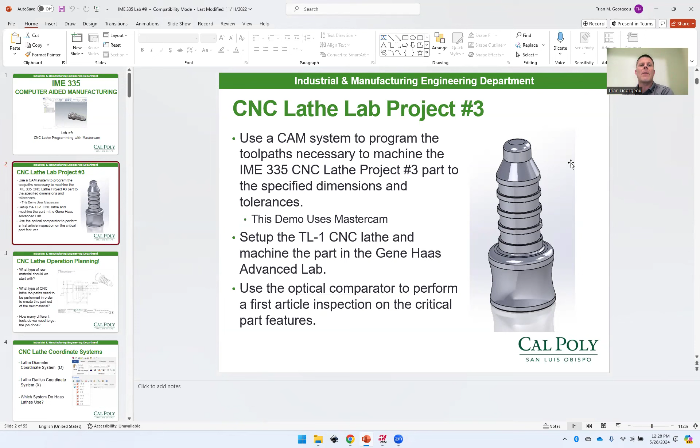We're ready to roll. So what we're going to do is we're going to program our CNC project number 3. I believe a lot of you turned in the drawing right before class, so you have the model. And what we're going to do is we're going to plan together. Sound good? So you modeled it.

What size stock would you machine this thing with? Leslie says 1.5 diameter. Yeah. Oh, it does say it on the drawing. So we're going to use 1.5 inch diameter, right? And if you remember last week, we have our stock in there. What's holding onto the stock? You say the chuck. So that orange is a chuck.

So we need to come up with a stick out length where you're not cringing when the part off tool is this far off the chuck. Sound good? Because I don't want that to happen. Now, if we look, this thing is 3.75. The part off tool is 1/8 of an inch thick. So right now, no matter what, the part off tool has to come to 3.875 back. I say we at least give it 1/4 of an inch plus that extra 1/8 that we have. So let's pull it out to 4 1/4. Does that sound good, everybody?

So when we set up on the lathe, we're going to pull it out to 4 1/4 every time and touch all of our tools off on a 4 1/4 stick out. Cool? So we know that right here to right here is 4.25. Fair enough? Now, then our diameter, 1.5.

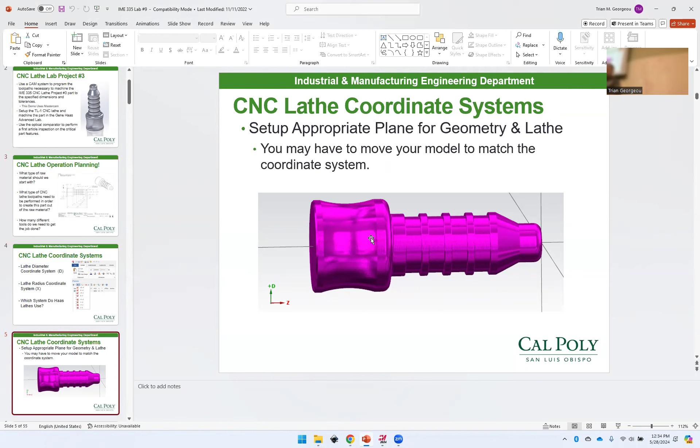And we're going to end up making sure that that gives us a Z and a D. Does that make sense? Z is along the length of the part. D is the diameters of the part. We doing good? It's really easy. This is 2-axis. And because it's 2-axis, we're going to go through the lathe post processor there. I could really program the whole part off that.

It's a half of a profile where the Z values are really what they are, and the X values are the diameters. We're going to talk about how that works. Sound good? So we're going to work on making that profile out of Mastercam. And then after that, we will go through, add stock, and then create the tool paths. I'm not going to come back to the PowerPoint. I would probably watch the video over looking at PowerPoint slides.

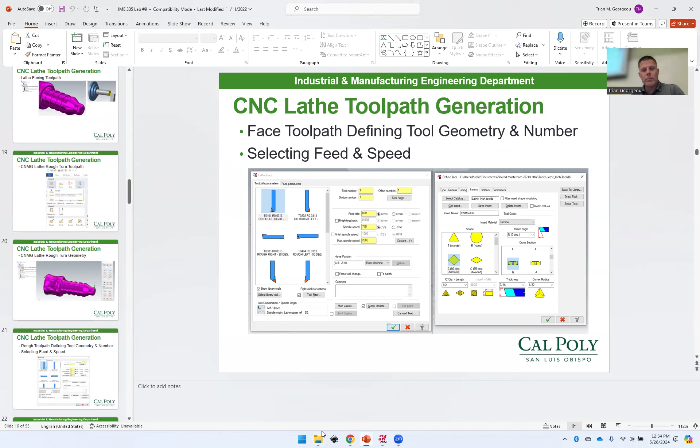Cool. So when I come into Mastercam, are there any questions so far? And if you get lost, ask a question. Don't have me redo it for you. Sound good? Go ahead. Yeah, you should. You use the part to make that profile. You can do it either way. You could draw line by line, or you could import the part and have it make it. Your call. So there's always a hard way of doing something, right? You can do it that way.

So check this out. We're going to go File, Open. And I'm going to go hit my computer, browse. I got to go find where I put it. So it's going to be in Spring 24. That's definite. It's going to be in 335. That's an even better guess. And I'm going to go find SolidWorks. I'm going to guess it's Lathe Project 3. And I'm going to press Open. Cool. I'm going to make mine shiny. Ooh. Okay. You didn't have to do that, but it looks better, doesn't it?

You know what? 3 out of the 4 teams were using Fusion. 1 team was using Mastercam. Thought that was interesting. You can bring its tools. You can bring whatever you want. Yeah. I'm not allowed to really tell, but Mastercam. But you don't know really who. I'm not allowed to say the name of the winning team because it's debuting on YouTube July 1st or something like that. Huh? Oh yeah, especially with me, I'm all over the place. I don't know if they liked me or just thought I was a weird Californian. We'll see. Probably both.

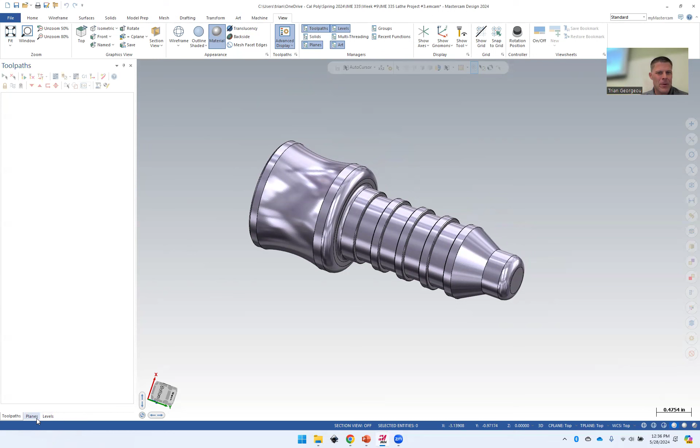So check this out. Is everybody doing good? Where do we set up over here? Yeah, planes. So we're going to go to planes. And when you have your plane here, if you look, we don't have a regular Cartesian coordinate system, right? We have the D positive, Z positive. But don't do this right now. I'm showing you some stuff. I'm going to make your life easier. Trust me. Don't do what I'm doing at this point, though, because there's a better way to do it. I just want to explain how it works.

So when I go to D positive, Z positive, and I go to equals, do you see down here at the bottom, this term changes to a D positive, Z positive. It's a glitch. Sometimes it goes away. Don't freak out if it goes away. So with that, I'm actually lined up pretty well right here. Now, don't do what I'm doing here again. I'm going to show you from scratch how to do this. I'm just trying to show you how this works.

If I went to model prep, wireframe, and called turn profile, what do you think I'm going to select? The part. I'm going to hit end selection. You do a spin. Its tessellation tolerance is 1 thou. It's how close it follows it when it spins it. It'll be fine. And I want an upper or a lower profile. What do you think? Upper, because that's positive D values or positive X values. Lower profile would be negative. So I want an upper profile.

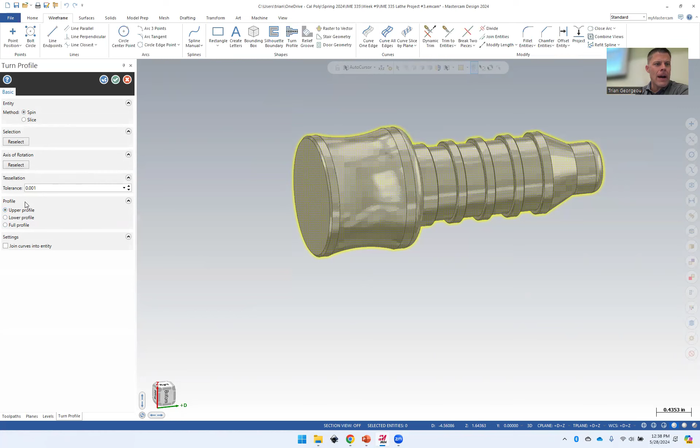And when I hit check mark, I probably should have done that on another level so I could show it to you hidden and not. You see that? So I'm going to press Control Z real quick. Get rid of that. I'm just going to go to 2 real quick and just show you wireframe. That way you're not putting it on the same level. You can hide it. You don't want your model and your wireframe on top of each other.

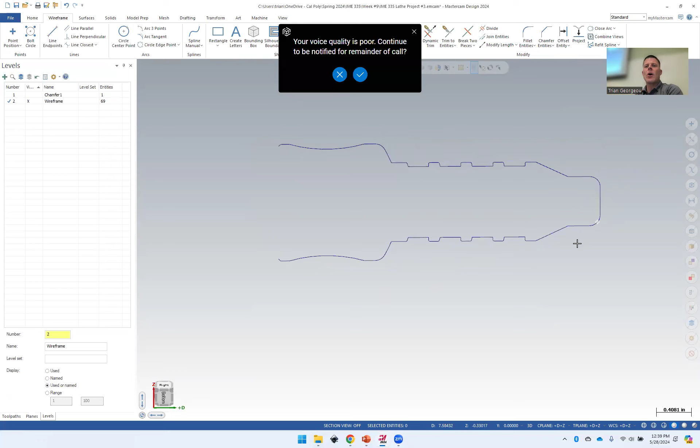So watch this. Turn profile, select, in selection, there, and I can turn off. Oh, I did the whole profile, didn't I? But, oh, no. It did half a profile, but it spun it this way. Does that make sense? So this is why I'm showing you this, because chances are it's not going to get your D and your Z's correct unless you align it. That's what I wanted to show you is the align function.

So when I go to right here now on home, I hope I didn't confuse you. Analyze entity. If I picked right over here, you're going to see the D and the Z, Z0, the D is negative, basically 1.45. So if you look, I'm not really at the right location, if that makes sense. Watch, I can also analyze position. Right there, my D is 7.5 and my Z is 0.187. Does that make sense? So I'm backwards on my D and I'm 90 off.

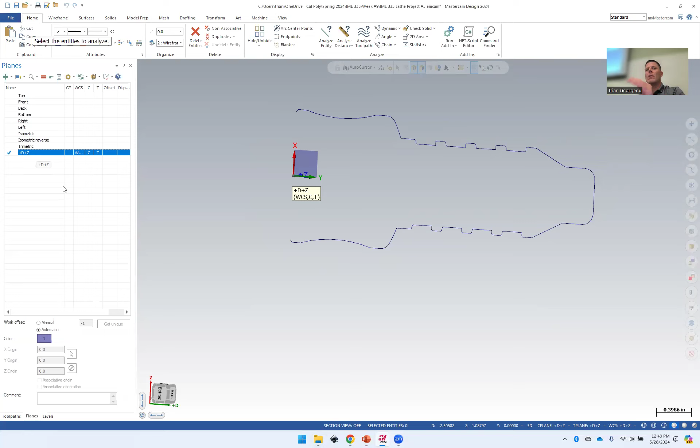Does everybody understand that? So I don't want to use the default planes D and Z is what I'm getting at. I need to align it first. Is everybody doing good? So what I'm going to do first is I'm going to just delete, because this is the wrong geometry. So I'm going to go ahead and draw a box around it and hit delete so I have 0 on my wireframe level. Does that sound good? And I'm going to go back and show my model.

Well, if you want to align it correctly, if you didn't draw it correctly in SolidWorks, if you didn't draw it down the Z axis, that's what you'd have to do. Draw it down the Z axis and have the diameters out of the X and it'd be all right. But I didn't do that. You probably didn't do that either. I don't think so. So maybe you did. Who knows? It's like a 50-50 chance or less than that. It's like a 33% chance because you have the 3 planes.

So what you're going to do is you're going to do something called the turn profile. Does everybody see under model prep? It says align to Z. Aligns a solid body for a turning operation to a new WCS or existing construction plane along the Z axis. We're going to create a new one using align to Z. So this is something you'd probably want to do. So we go to align to Z, and I'm going to call it Lathe WCS. Oops, not Z. There we go. Lathe WCS. Sound good?

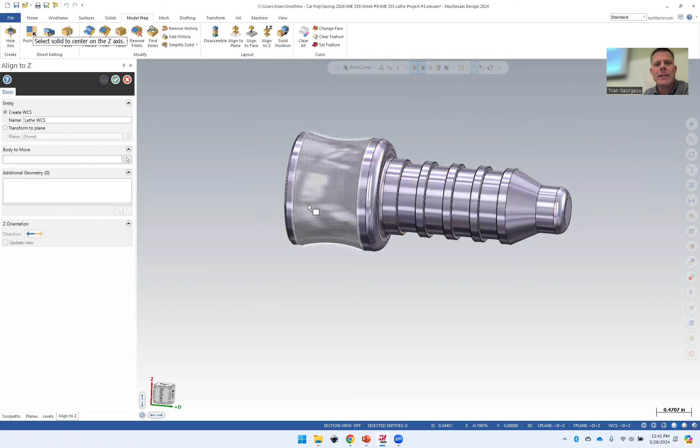Now, which is my Z orientation? I need to basically pick a circle. Any of these circles will work. Does that make sense? So I'll pick one. Now, is that the right way? It's opposite, 180 out, right? Do you see this button? Move it there. And we'll transform it later. We're just aligning it right now. Sound good? So when I hit check mark and I go to my planes now, does everybody see it says Lathe WCS?

So I'm going to do that again for you. Sound good? Delete that one. What's in use? So I'm just going to show it one more time so you align to plane. There's another way you could do it too. I could just transform it to plane, and I could pick my D positive, Z positive right there. That'd probably be the best. You just pick D positive, Z positive. You do that, transform it to that by flipping it.

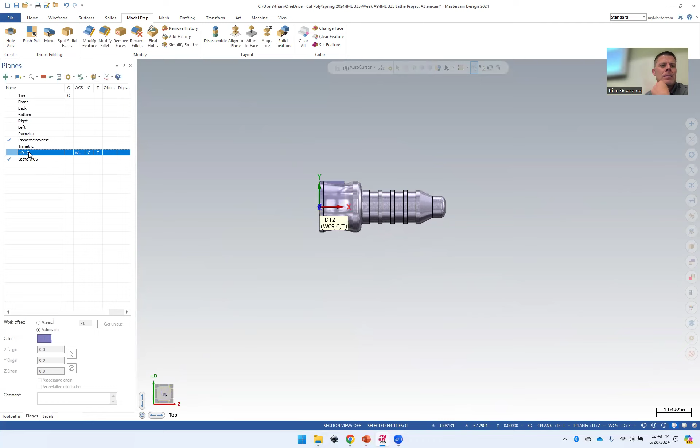Check mark. That's what I would transform it to, a D positive, Z positive, because you see what it does down here now, everybody? It gives you the D positive, Z positive. So I wouldn't just put it on its own plane. I just transform it to that D positive, Z positive. Now, when I click on it, don't look at this. Mastercam uses that XY plane for shading. And if you look, we got our D positive, Z positive down here. This is aligned with that. That's what matters. Does that make sense? Is everybody doing good?

Good? Perfect. All right. So now what am I going to do, you think? Now that I got it aligned correctly, what am I going to create? Those of you trying to do it, I'd probably watch this and do it later. So I would create my spin profile at this point, right? So when I do that, it's very important that this is WCS when you're creating this geometry.

Then I'm literally going to go, whoops, I'm literally going to go to model prep, or it's wireframe, turn profile, that face, that check mark, upper profile, check. And my level, I now have a half of a profile. Is this making sense? And let me make sure my half of my profile works. It's at the right location. Sound good?

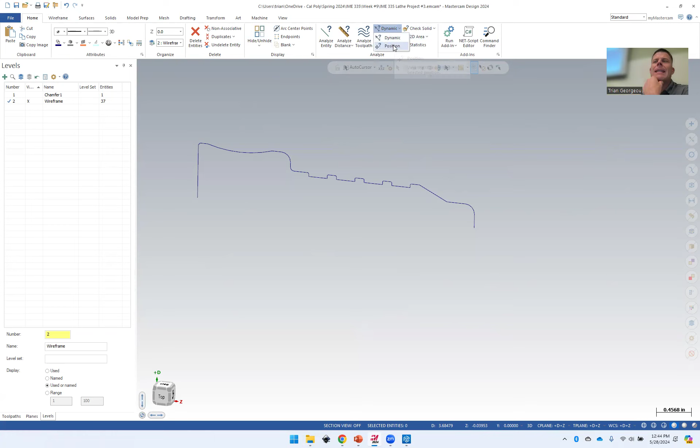So when I go to home, this is one of my favorite buttons, analyze position. If I go down here, 0 and Z is 3.75. We're doing good. I just got to shift my Z, don't I? Because it's in the back. But check this out. If I do analyze position again, it's underneath dynamic position. I come right here. That's 0.375 and 375. So we're doing good.

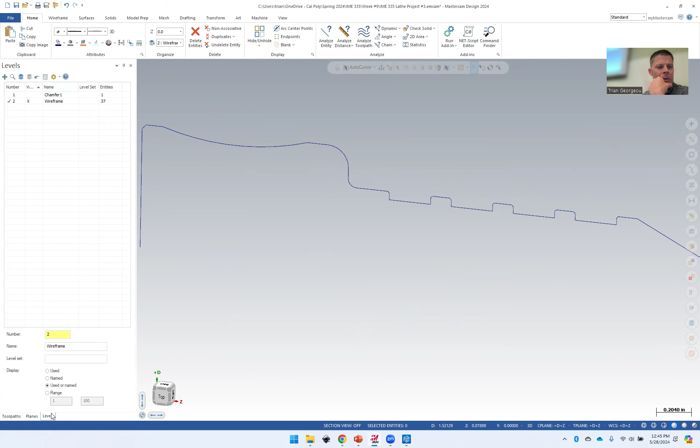The last one that I would double check under position is back here. This should be the diameter of the 480 or 1.48, right? 1.480. So we're good there. And the Z is 25 thou because that's the chamfer. We're doing great. Is everybody okay so far? Do you understand that we are now aligned with our geometry? Are you good? Yes. So it's underneath home, analyze, and underneath dynamic right there.

So the thing is, though, is my home location in the right location? Now we're going to put it at the front of the part, right? So can I delete this one yet? There we go. So I deleted the one I created that was wrong at the beginning. You good with that? Just because I didn't want it there. So what I'm going to do is, remember, this is the world. You can't change the world. You got to duplicate it. And then you can slide it to wherever you want, like to right here.

So I added the 3.75. Don't confuse yourself. It's in the X because it's off of the Cartesian coordinate system thing up here. It's weird how they do that. Is it not? Seems a little bit odd. It's shifted off the world is what it is. So everything's based off the world down here. Does that make sense? That's why it shifts at 375 in the X. Yours might be Y or Z, depending on how you oriented yours. I don't know how you oriented yours. You good on that?

So if I make that equal, I'm going to call this G54 or WCS G54. We good? Do you have any questions so far? So basically all I did was I got my geometry ready in terms of my home location. Yes. Here, bottom left coordinate system thing, D and Z down there. Is it blanked out?

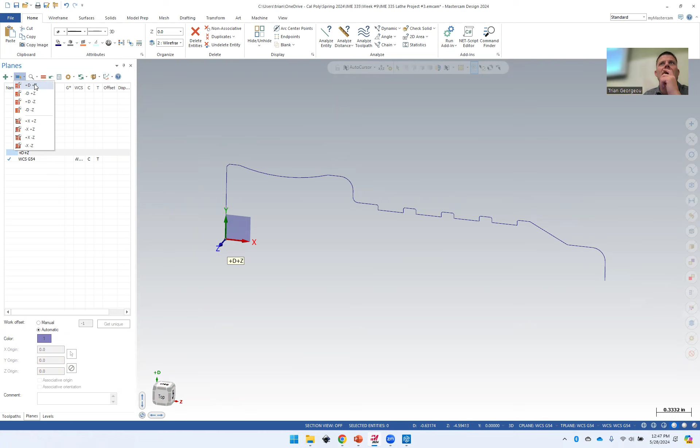Bottom of the string. Right here? Yeah, that guy. That's still an X. I wouldn't worry about it, but it's probably an X, Y, and Z because you didn't put D positive, Z positive at the beginning. Sometimes it defaults back, and I don't know why, but you should be good.

So now, one thing that you don't need, and I don't want you accidentally clicking on it, is this line. So I just want everybody to get rid of that back line because you could accidentally pick part off at the bottom of this line instead of the top of it, and things go bad with that part off tool. So we're just going to go delete right there. We just need to pick a point on the back. Sound good? How we doing?

Our goal, everybody, was to have a wireframe that has a position back here of negative 3.725 because it's before the chamfer. You see that? So, right, and then the 1.48, you see that? If I went ahead and I clicked that endpoint, it's 1.48 and negative 375. So I'm good. Does that make sense? Good, John? Cool. Just quiet.

Then right here, what should this point be? 0, 0. Do you agree? All right. So if you don't, you can still program along on your wireframe and we could probably move it later. Maybe. I don't know. You should be able to. All right. So I'm not going back to the PowerPoint, but the next step would be to basically add a machine. That sound good? Do you have any questions at this point? What's up?

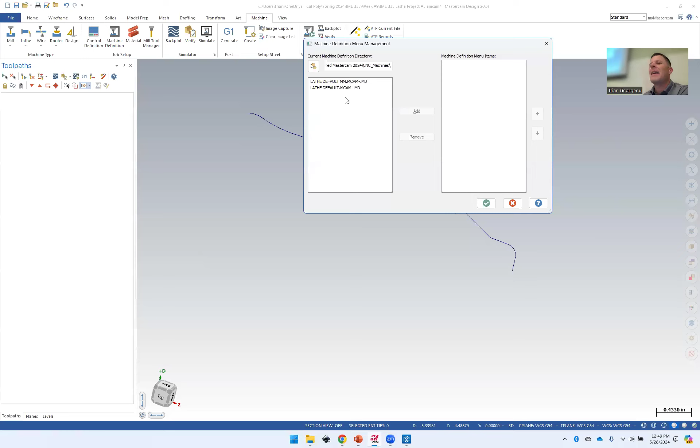We're good? Okay. So toolpaths. In order to get a post processor in here and make toolpaths, what do I do? I got to go to the machine tab and I go to lathe and I'm going to go to manage list because you probably have nothing in your list right now. You probably have 2 of them now, right? Which one are we not picking? MM. So we go to there, we go to add, check mark, and we now have a lathe right there that we can select. Is everybody good on that?

So when I pick lathe, machine group 1, I like to right click, rename, I'm going to call it lathe op number 1. Cool. You don't have to do that part, but that just makes sense to me. Now, let's build some virtual stock. Sound good? So we open up this little properties thing right here. You see that? And we click on stock. Stock setup is also up here in stock. But there's a stock model. There's also a stock setup up here, but I'm going to just go here.

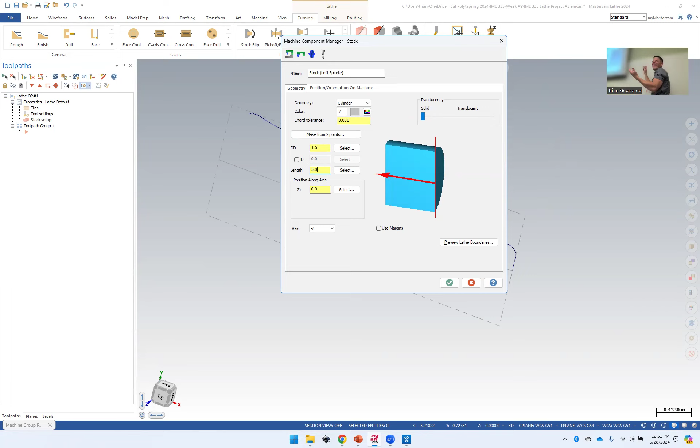And do we have a left or a right spindle? Left spindle. Let's go to properties. It is 1.5 OD. Do you agree? How long is it? I want you to go 5 inches right now. I don't want you just to do 4 1/4. The reason is it's going to look funny if you do 4 1/4 and you have a chuck because it's going to like not be holding on to anything. You could do that, but it doesn't matter really. It's just virtual, but bring it back to 5. Does that make sense? So we're going to bring it back to 5.

Position along the Z-axis, everybody. When I see it, look, see it's building my stock out there. What position is it along the Z-axis? What do I do? No. Right here. This 25 thou. So watch this. You see my stock up here in front of my part? When I add 0.025 tab, it puts the stock in front of it. So when I face off at Z0, it qualifies the part and machines the part, not the saw cut or the part off tool surface that the last person who just parted one off did and you pulled it forward. You don't want their part off tool surface finish.

It looks horrible, especially with our high speed steel one until we steal one from Mustang 60. We're going to give it back, so we're going to borrow. Then if you bend it, we'll have to buy them one. I told Brian to order one. I don't think we got one. I haven't seen it. I haven't been around though.

Is everybody good with the stock here with this setting? Does that make sense? So when I hit check mark, what else should I probably put in there to make sure I don't hit? Chuck jaws. Yeah, so we're going to go to properties. We're going to go to parameters. What's the diameter of the chuck jaws? If the stock is 1.5, what's the chuck jaw diameter? 1.5. Now, do you see where they are? They're up there in front of my part right now. You see it slowly building it? That's not going to be good.

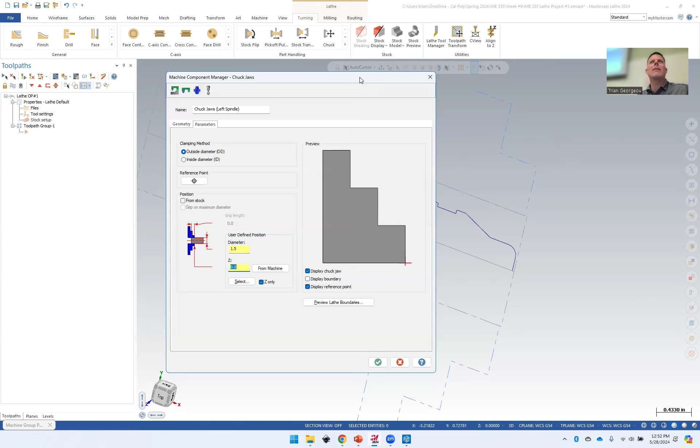No. So where's the Z? Is it 4.25? If you look, it's negative, isn't it? See, it's back. So it's negative because it's all based off where Z0 is. Is everybody good with that? So check this out. I got 4.25 negative and a 1.5 inch diameter for my chuck jaws from the Z0.

Now, back to my geometry for my chuck jaws. We're going to use their default ones. Do you see this? It's a parametric spreadsheet. You have a step on the jaw, you add a step. You don't have a step, you take one away. And it basically sets up some generic jaws for you just to stay away from. So what I normally do is I give it like 25 extra thou on my jaws right here, just in case, or 10 thou. Sound good?

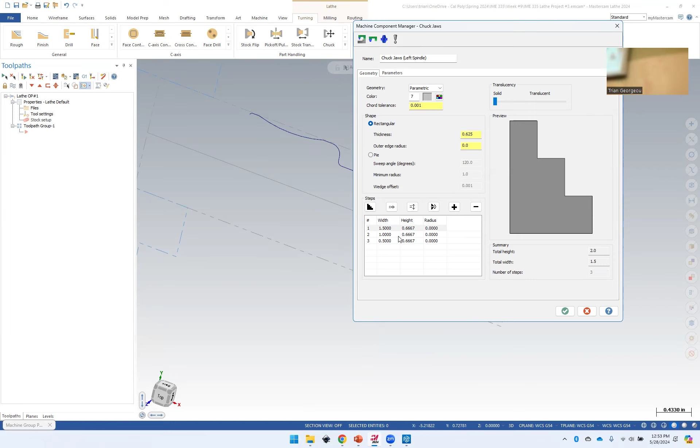So I'm going to leave the default. We're good. I've never measured the ones we have. They're fine. So you're not going to get back there over the jaws. Sound good? If you were, we would measure them. So we'll hit check mark at this point then. And then one last time, check mark.

What that does is it puts some stock in there. See what I mean about the stuff? Now, that even still looks pretty sketchy, but we'll be okay. Sound good? If you're pulling out and you only have like this much left, what do you probably do? Probably put a new 3-foot stick in and put that one back in the rack for right now.

Sound good? So if you don't feel comfortable with how much you have gripped as you pull it out, some of you will have that issue, depending on where we cut the bars. So you got like 3-foot bar stock. I don't know what part number it's going to be on that bar, but it will be an issue.

So at this point, you could actually shade your stock right there, if that makes you happy. I like it. It's going to make me happy. Sound good? I'm going to keep it like that. So now we're ready to make toolpaths. You ready to make toolpaths? I am. So check this out.

Why do we have a milling toolpath thing in our lathe post-processor? We could have a y-axis lathe, and I will demo how y-axis lathes are programmed next week. Sound good? So we got to learn the basics first. Then I'll do a simple part on a live tooling one to show you how to bring in milling and turning together. And that'll be it for Mastercam.

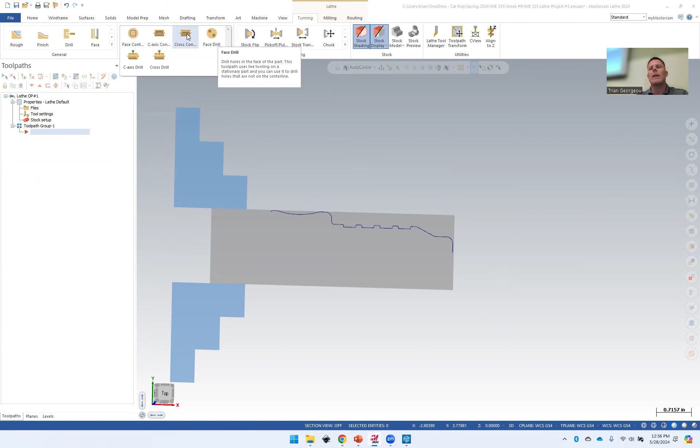Then they have machining cycles. So if you wanted to post canned cycles that the lathe puts out, like a G72 or 76, it'll post in canned cycles instead. Pretty cool. Lowers your amount of code. So that's what it's got. We'll talk about these C-axis ones that are also made for live tooling later on. So let's use the first toolpath called face.

I might need to get my water bottle at some point.

So for face, we now need to set up our tools correctly. There's four different types of tool holders. They're right there in front of me. OD rough right. OD rough left. What's the difference? Right hand tool, left hand tool. So back turning, regular turning. Cool.

Does anybody know what this type of tool is? This is an OD tool, you think? Or what do you think? If they have ODs, what else do they have? These are boring bars. So this is a right-hand boring bar. What's this one? Left-handed boring bar. Doing good?

Now, these are just sharper tools. What are the sharper tools you have to do? Finish. These are like facing ones. These are grooving tools. What do you think we're going to use? We're going to build our own. We're going to build our own off of tool 1 though. How does that sound? So double click on tool 1.

Used to be double click. There it is. Mine's just super slow. Now, let's say we have our catalog. Select catalog. Oh, shit, this is great. Well, that's on video.

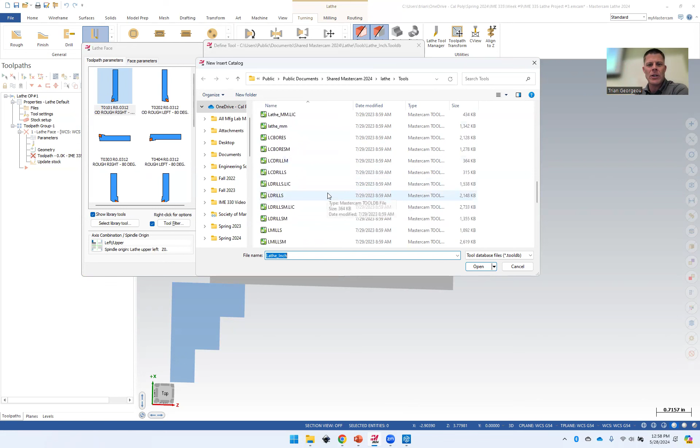So what we got, we got ISCAR, we got Kennametal, they got catalogs. You know why? They're all the same inserts. They're all the universal designation. So, oh, look, there's Sandvik. So if I open that catalog, I hit get insert. Oh, geez. It's literally the exact insert with the chip breaker or anything. But we know about inserts. We're engineers. So we're going to build our own.

So what are we using? If I went back over here and zoomed in, for roughing and facing and turning, we're using a CNMG 432. That's all we need to know: the shape, size, relief angle, nose radius of our insert. Sound good? Now, when we go back to Mastercam, I don't even care about the inserts here. Delete insert. I don't even care about the catalog. I just picked one. I'm going to call this CNMG 432 because that's the one I picked originally.

Now, how does that work? Number one, it's a C. Is everybody good on that? What's the next letter? N. It's the relief angle. We learned about this. The next one, M, was basically the tolerance. Do we care about a tolerance on an insert in a CAM system? No, we're making it perfect, right? So it's not there. G is the mounting method. Do you remember that? We have a double hole. You know why? We have a neutral insert. We can go both sides. So we have a G.

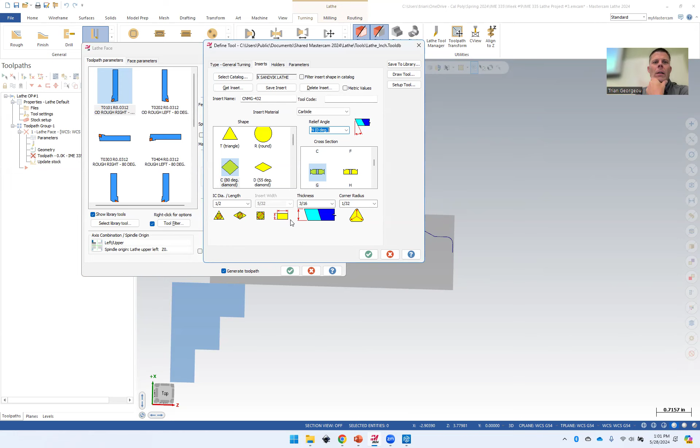Well, that's not all. So if we didn't have that insert in an OD holder, everybody go to the turning one right here. There's turning, threading, a grooving holder, a boring bar, a drill, or a custom. Ours is set up in turning. Then the holder is either right or left. You can actually build the holder. But we're set. It's a 5-degree holder. Don't touch the holder. Just make the insert right.

You would care about the holder if we were worried about shanking it out on the back of the part. On this part, we're not going to shank this one out unless you accidentally do the second operation with it. Hopefully you pick the other tool holder. It's on video. So you should be good.

So now we got parameters. This is going to be our tool number 1. We're going to use the power on that lathe, so I'm going to rough at 12 thou. We're not plunging into anything, but in Mastercam they have a plunge rate if you're doing dynamic turning or plunging with one of those neutral ones. So I'm going to make this 12 thou as well.

Now, spindle speed, I could do CSS. What does that stand for? Or I could do RPM. What do I do when I'm turning on a lathe? CSS. So with carbide and aluminum, we're going to run 650. And we're probably going to max that thing out by the time it hits about 1 inch diameter. It'll be spinning as fast as it can spin.

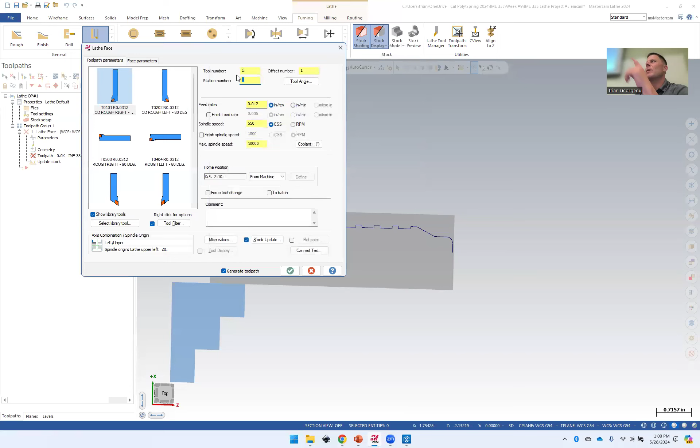I built a tool that I can use now for basically facing and roughing. It's my tool number 1. It's tool number 0101, right? And it's 1. Don't worry about stations. We only have 1 station in this machine. Some machines have dual heads, dual stations.

So now the feed rate, is it going to be inch per minute or inch per rev? Inch per rev, G99 inch per rev, that's lathe feed and chip load. We're going to run that 650 CSS. What's our maximum spindle speed? It's 2000 on that lathe. So that's what I do. I set up my tool and my feeds and speeds in my first tab. Look how easy the second tab is.

What I would hit is use stock. You know why? It knows where the top of the stock is and where it's at. If you don't use stock, guess what you have to do? You have to draw a rectangular box by selecting 2 points and it'll face within that box. So like I would start here and down there and it would face in between wherever I started and stopped. But we have stock, it recognizes stock, so use stock.

Cool? So this is 25 thou. I was going to do 10 thou finish pass. Sound good? Actually, I'm going to leave 5 thou for the finishing tool to come touch. Just made that up. Programming on the fly for everything is way more fun.

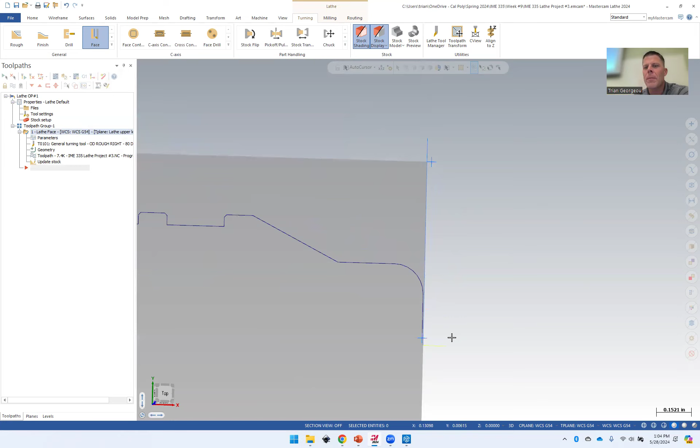Way more. So when I hit check mark, what did it do? It came in and it actually shortened my stock. Do you see that? The stock got shorter and it left 5 thou. It did 1 pass. Yeah.

On the center screen, the second tab. New stock. I have 3.75, 0. That's how we set it up. You might have your Z in a different spot. Bobby, you just don't have it, yeah, so we can shift that later, most likely. What do you have for your entry amount there? Where's my entry? 0.1. That's just the default. It's staying 0.1. So that's this line right here saying 0.1 away from when it first starts cutting.

Is everybody good on this? So do you see where my line is? Watch when I press check mark, it'll go back and show me what this toolpath did to my stock. That makes sense? So watch, boop, see how it disappeared? It got shorter. We good? So we just faced once. We're good. We kind of qualified a surface. We left 5 thou. What do you think we're doing next?

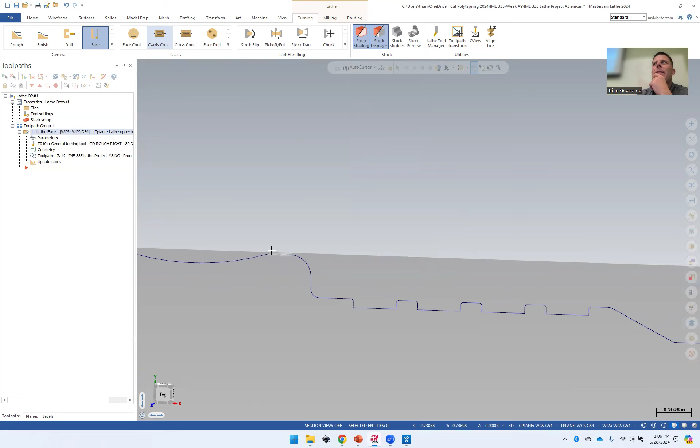We are going to rough turn. Sound good? And so technically there's only about 20 thou up here. So we're going to rough turn in 2 segments. We're going to rough turn here, but we can't dive into here with our tool holder. We'll shank the back side of it. I do that on purpose to show you how you sometimes have to switch tools to rough.

So when I go to rough, I'm going to pick the chain, but I don't want the whole chain. You see that? If I do this, it picks the whole thing. So I'm going to press the red X. I'm going to pick partial chain, and I'm going to rough from the nose to right there. So green start, red stop. Is everybody good? I'm going to rough out all this material right here. Now to do that, after I've selected my geometry, I hit check mark.

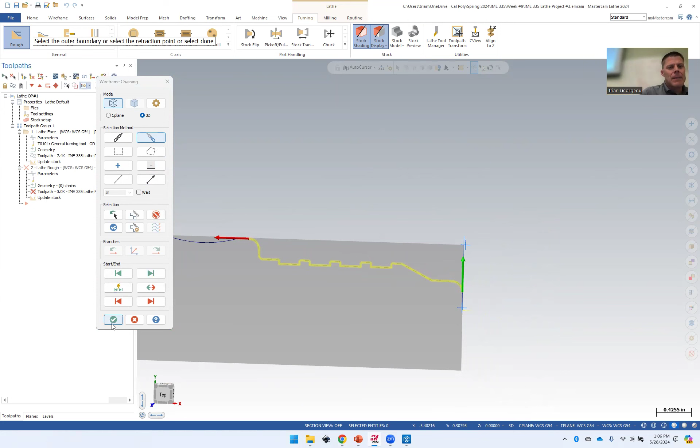Did my tool change? Not yet. Not on this one; on the next one, it will. So we're going to use that big stout tool to rough as much as we can off of this. Did my feeds and speeds change? No, but that's 10,000 RPM. I obviously didn't set that right in my tool information menu. So I got to fix that. If you put 10,000 in there, don't care. It's just going to redline at whatever it redlines at.

It's kind of like if you drive your car, you just keep flooring it. It's going to stop at some point. It's not going to blow up.

That's how you shift, right? Yeah, man. That's how I shift my GSXR.

It's actually really cool. It's got a little strain gauge on the shifter, so it cuts the ignition timing and it's insane. I've never had anything like it. I got an adrenaline addiction, just to let you know.

So now, rough parameters. At this point, we are not going to rough at 100 thou depth of cut. You know why? You might stall the lathe. It's only 7 horsepower. The Baja car is more powerful than our lathe. So literally, we're going to go 50 thou on that. Sound good? That's actually going to push it quite a bit too. That's 100 thou in diameter, 50 thou depth of cut. The other one was 200 thou in diameter, right? So this is 100 thou taken off per diameter, per cut.

Now, do you think we should leave some stock if we're roughing? Yep, so we're going to leave 10 thou in the X and the Z. The lathe is cool. It allows you to leave it only on the diameter or only on the lengths in case you're going to maybe just finish grind something. So you can, like that. It's pretty cool, right? So you can come up the walls and only leave it on the diameters. Or you can leave it in both, which we're going to do in this example.

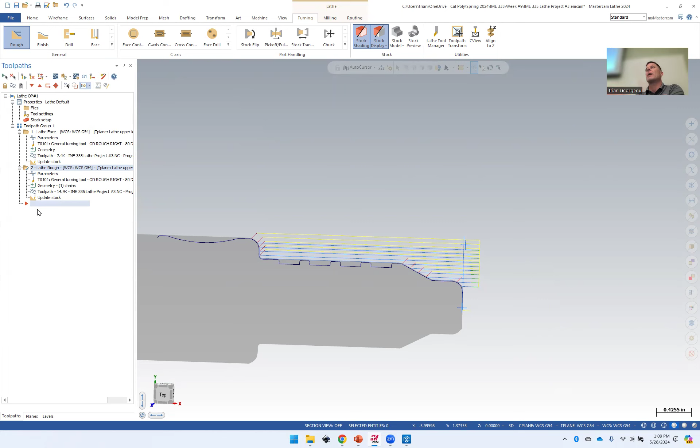Now, what we haven't done is come back here and rough this out. I also want to split that up because there's something called undercut. Let me show you this on the last toolpath I just did. I'm going to show you I can really mess this part up. So there's something called plunge cutting. It's down here. Do you see plunge parameters? It's skipping any grooves right now that are negative that it can't get into.

If I took that off on both ways, X and Z, and hit check mark, it tells me I collided again. So what it's trying to do, look, it's trying to drive that down, you see? That is not good machining practice. Does that make sense? You make grooves with a grooving tool on a lathe. So you want to take plunge off for the first one, but not for this next one when we're roughing. You know why? The next one won't plunge down into here unless you take that off on the next roughing toolpath. We ready for this?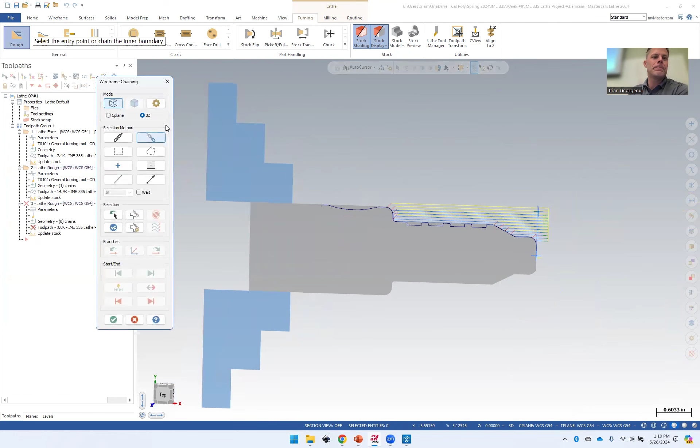All right. So the next one we're going to do is another rough toolpath. Now, we want to start right there, and we want to end right there. We want to rough out this little bit of material before we come in with a finish pass, all one smooth move. You good with that? So I'm going to hit check mark. My tool has changed now. They actually have one that's very close to the final one that we're going to build, and I'd recommend just building it off that. Or what you could do is right click, create tool.

Let's right click and create tool from scratch. Sound good? So I'm going to create tool. Is it turning, threading, grooving, boring, drilling, or custom? Turning. So now I select that. I'm going to write over here the insert name: VNMG332. That's what we're using. Does it say 432 on your handout? So the handout says 432. We have 332s. That's a mistake. Sorry about that. What really matters is the nose radius. If you accidentally did 432, it's just a little bit bigger. You won't notice it in the cutter comp.

So to make this a VNMG, I've got to take it off a C, don't I? I'm going to drag this down to the bottom of the alphabet. Oh, it's not in alphabetical order. There it is, V. They leave all the diamonds together. So V, N, M is the tolerance, don't care. G is the mounting, we're good. Now it's a 3, so it's 3/8. Then 3 is the thickness, 2 is a 1/32 nose radius. We're good to go now for the insert. The holder is actually the -5; it will work. Let's leave that -5. We'll be good.

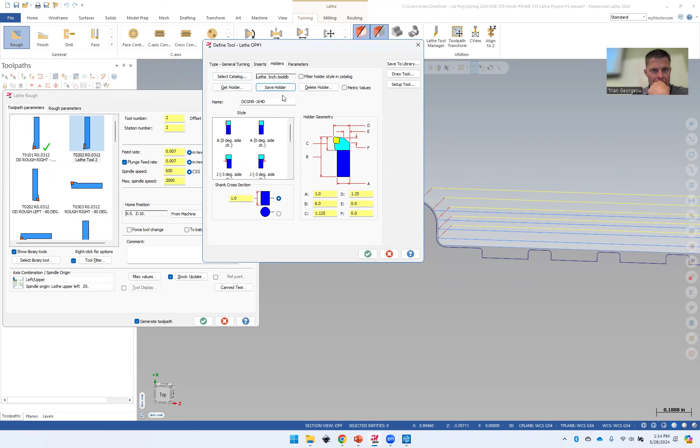So does everybody see the problem with this holder? It's a DC. We need a V holder. Do you see how it's holding it funny? So the real way to do it is just to come down right to this one, since it's already got it, OD finish right. We're going to edit that one. And it's literally got the VNMG 431. You just change this to 3/8. That's all I did was just change that to 3/8.

And then I went to the holder. You see how it had this E value. I couldn't find that holder with that. It is the MVG, the one I told you to get. Mine didn't update my pictures, my problem. So I went and grabbed it again. And then the parameters: 7 thou chip load, 7 thou plunge. It's tool 2. So you can update the default tool 21 in Mastercam to tool number 2, and then give it the values. It's being videotaped, so you could go back and figure that out if that doesn't make sense.

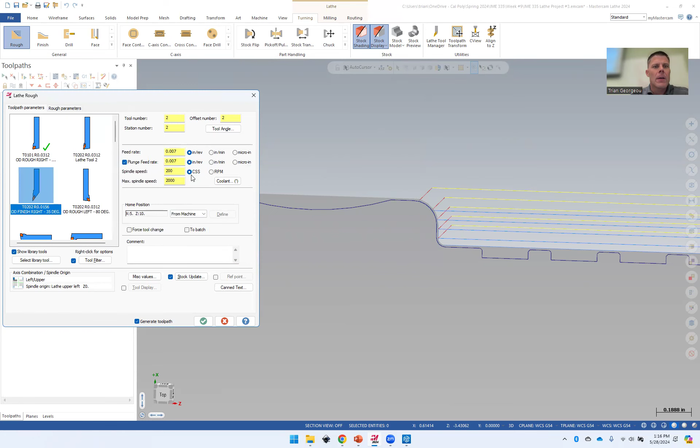Do you have any questions for me right now? I'm going to right click on that. Do you see how the holder looks different from that to that? I built one with a C holder, but I put a V insert into it, and that's not a good idea. It was the tool designer, so I wanted to get rid of that one. No, I just won't select it. We'll be fine. So back to my rough parameters.

We cannot rough at 50 thou depth of cut with this insert. You'll hurt it. So we're going to do 25 thou. We're going to leave a little bit of stock. Now, if you don't change the lead in and lead out, you're going to crash the tool, and it'll tell you that. So can I show you it crashing first and then go back in and fix it, so you can see the bad way and then the good way?

So there's these lead in and lead outs right here. And the lead in and lead out has an entry vector. Do you see that? It's at 0, 90, 180, 270. Like the robot. So right now on a 180 entry angle, that's going to be bad. So when I hit check mark and change my plunge parameters to plunge so it's going to cut something, it says, warning, collision with stock. Continue? Sure. Check mark. So when it's coming in, it's trying to plunge in and it's colliding with the stock and the holder. That's not going to be a good day for you.

So let's go back to parameters. In order to fix that, I go to my lead in and lead outs and fixed direction. I want to be perpendicular in. So it's going to come in at the curve and go perpendicular into the curve, drop down, and then come out. Instead of giving it a fixed angle, you allow it to just go perpendicular to it. Is everybody good with that? So that's my lead in.

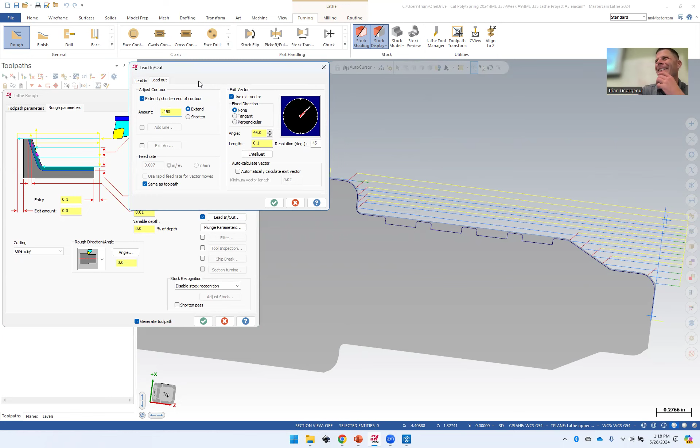So when I hit check mark and check mark, do you see I didn't get a warning that time that I'm crashing my tool? That's usually a plus. And do you see how my part's starting to look like my final part? I just left 10 thou on that one, so you can see it. You see how it's not on the line yet? Okay. So we are now ready to take that same tool and finish.

There are two ways to do finishing. I'm going to show you the way I would do it if I was doing it for a part, because I have to be able to take the finish tool and go all in one pass. The problem is if I have plunge on, what's it going to try to do here when finishing? Right? But what's it going to need to do right here? Plunge. So I'm going to create my own wireframe layer for finished geometry. I'm just going to get rid of these things. Sound good?

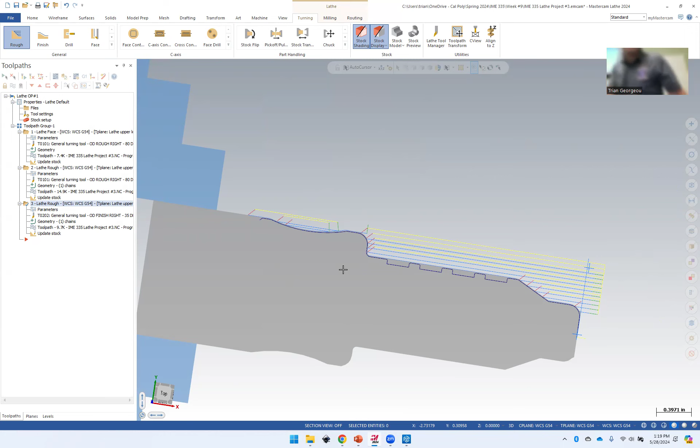So to do that, bear with me a minute. I'm going to hide my tool paths because I haven't been doing that. It looks horrible, lines all over the place. So we go like this, like that. Okay. I'm going to go to my levels and I'm going to write 3 and I'm going to write finish wireframe. Sound good? Now with that, I'm going to turn off the old wireframe and turn back on my sweet looking model. We doing good? All right.

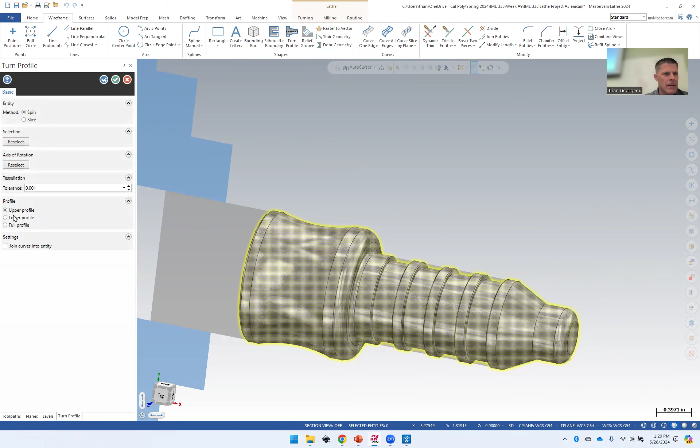So what do you think I'm going to do to get me some geometry real quick? I'm going to go to that wireframe. I'm going to do turn profile, click on that in selection. It's going to spin it. There we go. Check mark it. Go back and hide that. And for my finish tool path, well, number one, let me show you. I want to go to the end of my chamfer. Sound good? I don't want to undercut down into that chamfer.

So there's this really cool tool under wireframe, under modify length. What's the length of the chamfer back there? Do you remember? The chamfer's 25 thou. So if I go 0.025 and I click on that line, what did it do? It lengthened it so it's at the same stopping spot, because I don't want you to accidentally plunge down to that. Probably wouldn't notice. I would notice.

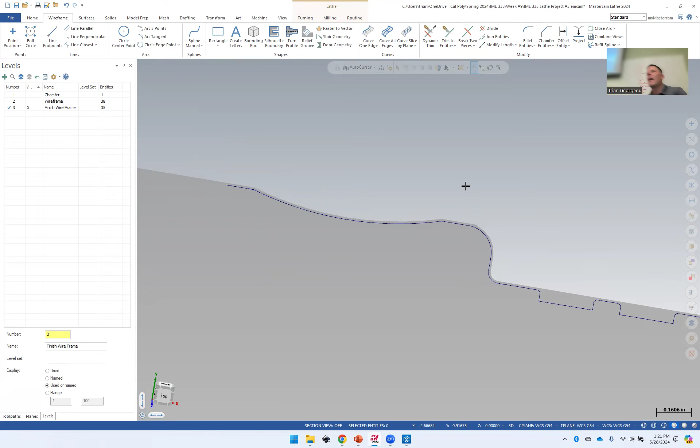I would notice. I started looking at people's parts today on the cart. I noticed a few things. I was like, so now... I noticed Mo's not here. I was going to give him a hard time. So I was looking at his part and I was going to say something about it, but now I'm not going to. Go ahead.

So Control Z, Control Z. Check this out. When you lengthen in the wrong direction, it's because you're clicking on the wrong side. Mastercam uses this line and picks the midpoint of the line. If I go a little bit to the right of the midpoint, it's going that way. Control Z or escape. If I went a little bit to the left of the line, it goes that way. That's the same when you pick your tool paths. It's where it starts. So you want to pick on the side where it started, where it's closest to.

It's kind of weird, huh? It's crazy. There's these little things that if you don't remember, that's how they used to do it. So now when I hit check mark, what am I going to do with this one? Delete it. I don't need it.

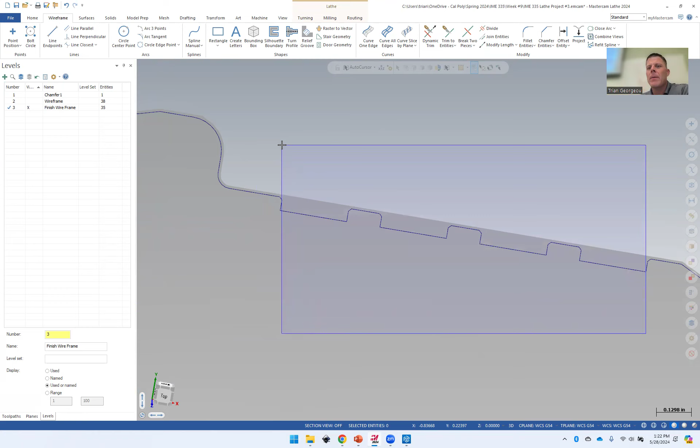Now, what else am I going to delete here, you think? I'm going to take basically my window. Did you chamfer yours up here, by the way? If you didn't, you need to chamfer it in Mastercam or bring it in with SolidWorks, one of the two. But if you had sharp corners right here, you just use the chamfer right here. You go chamfer and you put the 10 thou chamfers that the drawing said on there.

That's going to make it so you can chamfer it with the grooving tool. Does that make sense? Because your wireframe has a chamfer, the part will have a chamfer. So you just use that. You know how the chamfer entities works. You got a square corner, 1, 2, chamfer. So, let me go to my view so I can make this easier. I'm going to go to my top view, which is what I'm at right now.

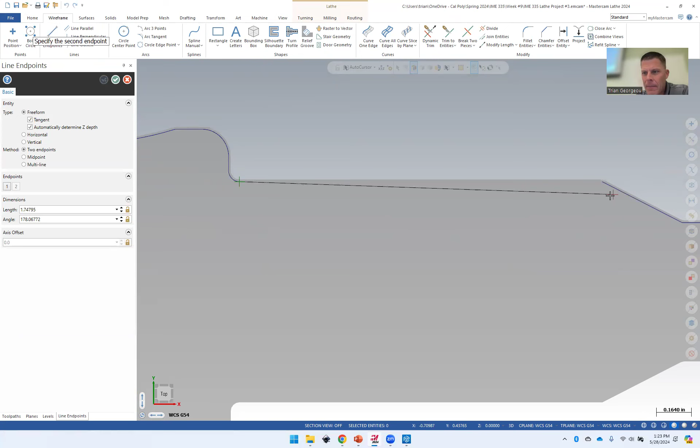Whoops. And I'm going to drag a box around all that because I don't want any of that. I don't want that. I don't even want that, or that. All I want is one line wireframe between that and that check mark. Do you see what I'm doing there?

Now, if you wanted to make your part a little bit smoother, you could put a little fillet right there. I don't care. It would work. I just want you to learn how to program a lathe. I don't care if it's got a fillet or a sharper corner in it. Sound good? Then you can go make stuff. All right. So all that work just to get a finished toolpath wireframe.

Now, what I'm going to do is go back to my turning. I'm going to go to my finish. Sound good? So when I hit finish, I go from there to there. If you didn't want to spend the time doing this wireframe, you would have to make one finish pass like we did roughing for right here, and then you make another one for right there. One would have no plunge, that one would have plunge.

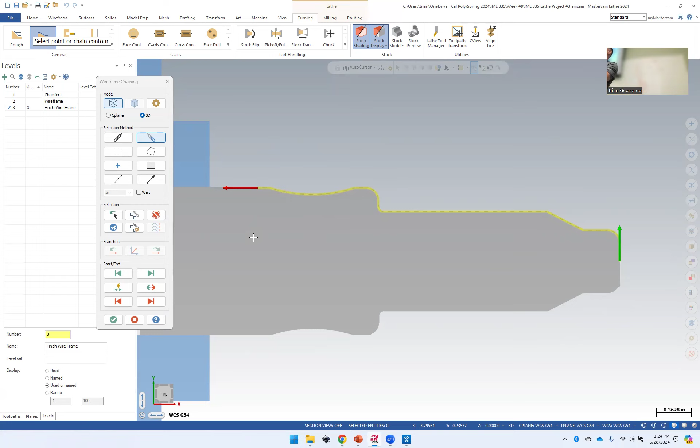But I think a smooth motion of the tool is way better than coming around, stopping, coming back around and finishing again. So a lot of the times you just draw external geometry to make your CAM work. Now, when I hit check mark, did my tool change for finishing? No, but my max RPM should be 2000. So I'm going to run 650 surface speed. I'm going to run a 6 thou chip load for finishing. You can run 7. I probably wouldn't be able to tell the difference.

When I go to finish parameters, I'm not leaving any stock. I could do multiple finish passes if I wanted to. I could do 10, 10, and 10 if I needed to. I could go to my lead in and lead outs, and I want to extend the back a little bit, that 150 thou. That way I have room for my part off tool to come in. I don't really need it. I could just part off stock, but it's just something I've always done.

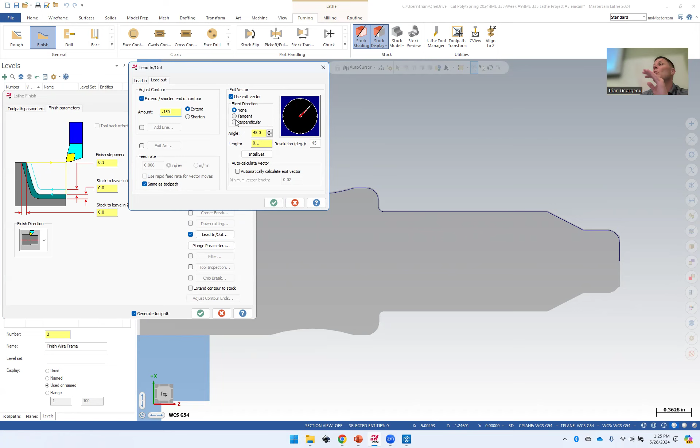Now, I believe the default lead in and lead outs work fine on this one. So when I hit check mark, I want to go to plunge parameters and make sure that's turned on, so I can go ahead and finish the little radius in the back of the part. Then I'll hit check mark there. I'll hit check mark. And it does one finish pass. It comes in and comes right around and comes off. Yes.

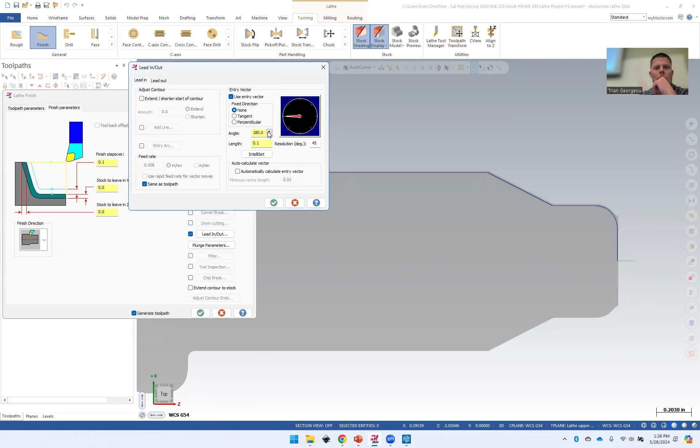I left it as perpendicular right there. It wasn't on that? Well, let's go see. It was on the default, whatever finish has, huh? So it comes in at 180. 180 is perpendicular. Because, watch, the lead in is 180 in, which is perpendicular. No, we don't need to do that one because it already is technically. And the lead out 45 seems to work real well after it's done.

So now it did one finish pass. Oh my gosh, there's my geometry, but there's my toolpath line. Let me turn off that stock. Why is it doing that? Can you explain that on a final exam? Anybody? Wait. Let me turn on my stock again. Oh, no, hold on. Wait, but when I shade the stock, it matches the line. But my lines are not there. What's going on? Who am I going to put on the spot since no one wants to say it?

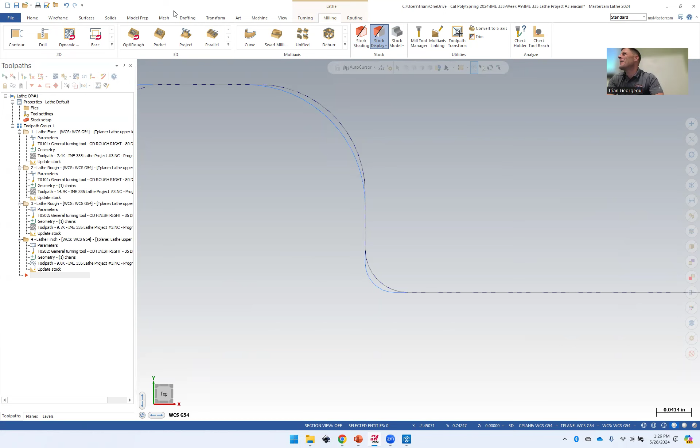What's going on? Cutter compensation. Look at this. Did you want to have to calculate where that went as it comes around that radius? See it? Look at that. Then when it comes over here, look, it's undercutting up this side, overcutting up that side because of that theoretical tool tip. You know how they did it back in the day before CAM? Charts. They had a theoretical nose radius.

You're laughing. Watch this. Hold on. I bet you I can find a chart when I search. How about lathe cutter offset? Oh, look at that, cutter offset chart.

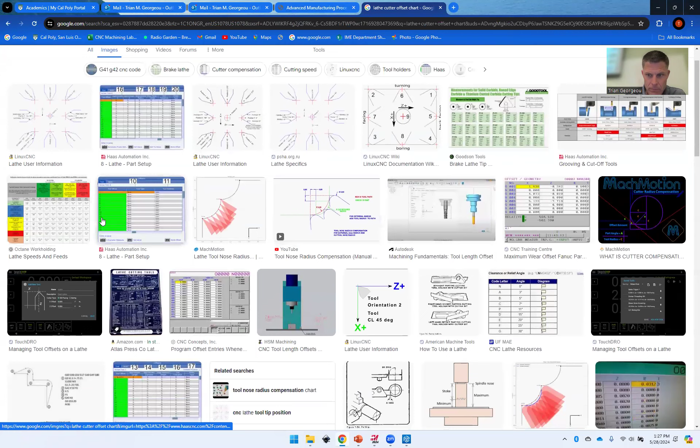Images. I'm just going to go to images. Well, hold on. Oh, you know where it is? In your reading. Should have said that. It was in my reading, Mr. Georgeou, Trian. So let me go right here. Let's go to the lathe workbook. I just want to show it to you, just so you can get an appreciation for CAM. So where's the programming workbook? How come I can't find it?

It's week 7. Sorry, what's the radius on the finish tool? 1/32nd. We all have 1/32nd ones.

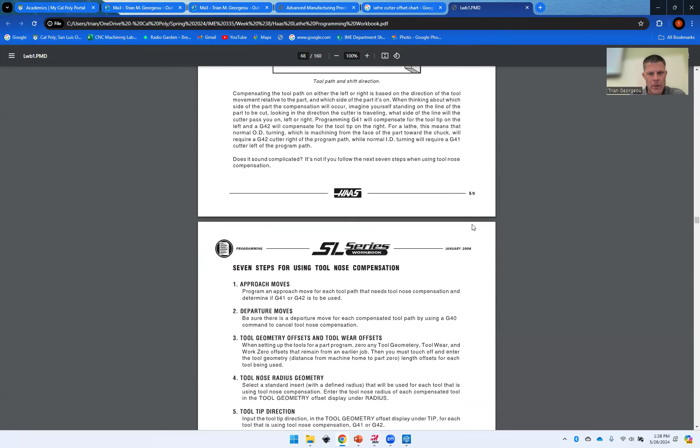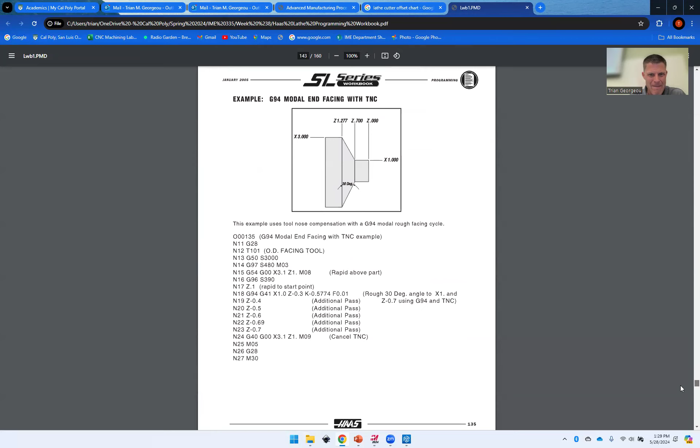Here it is, programming workbook. So check this out at the end. Let me go find them. Tool nose compensation. Here we go. Theoretical tool tip. Where's the charts? Oh, wow. I just want to show you the charts, the struggle was real back in the day. Oh, there they are. Oh, that's the thread chart. Hold on. Gotta find them. Yeah, I wouldn't have read this much either.

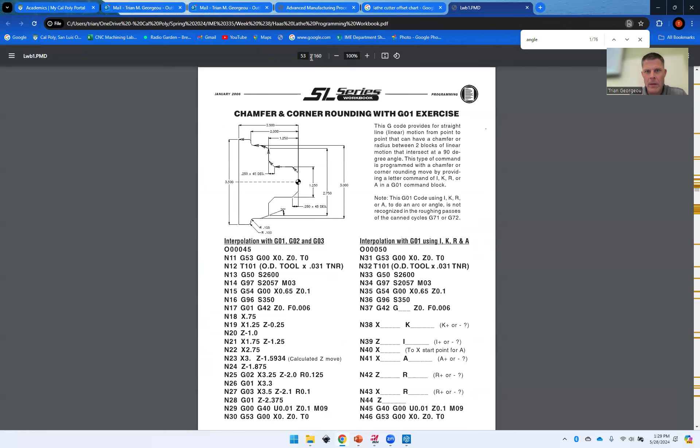Control F, maybe? How about manually program TN 53? Oh, that's page 53 here. Hold on. Here it is. Tool nose compensation. Look at this. This kind of explains it right here. Here's a basic. They have charts with every angle, if that makes sense.

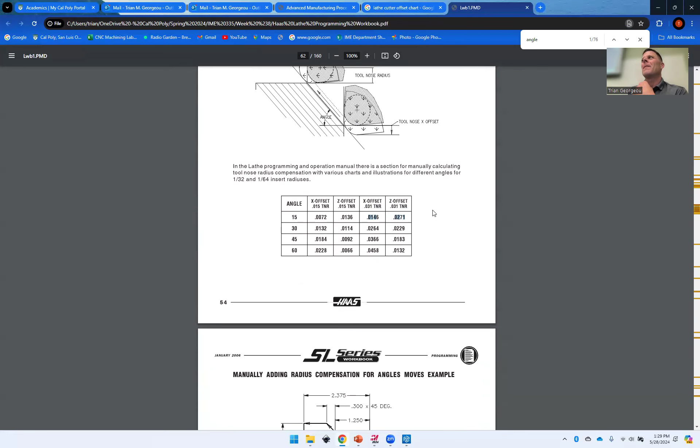So the tool nose radius calculator. So if I was doing a 1/32 tool nose radius, the X offset, and I was doing a 15-degree angle, I got to do the X offset at basically 0.0146, and then the Z offset's 0.0271. So they had to use charts programming by hand. That's just trig though, right? So back to this, that's why that's offset as it goes through, right in the center of the contact.

Go ahead. Sorry. So, is there a good way to edit the tool nose radius? Mine's looking a little different. Yeah, definitely. I don't know if it would be the tool nose radius that makes it look different. But if you needed to edit anything, you could go back to your parameters. You could go to your tool path. You could right click and you could edit tool. And right there, oh, I messed up. Mine should have been 1/32.

So I see what you're saying. You said you're over and you're undercut. Yeah. Oh, thank you. You caught me. I would have built the wrong part. But that looks more like yours, right? Where it's over. Yeah. Does everybody understand that though? Because you have to explain on the final exam why we need that.

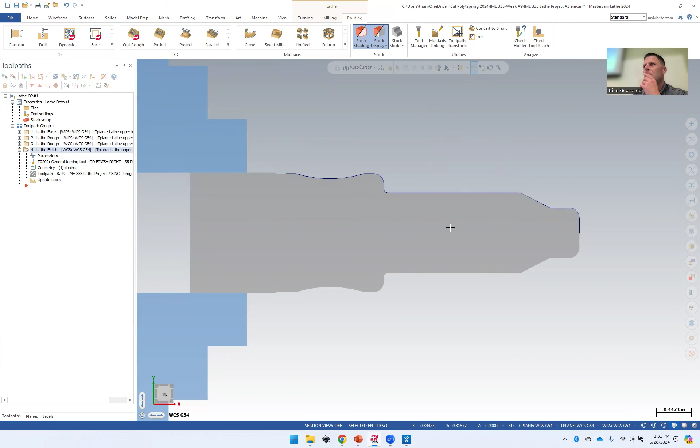So cool. So at this point, if we look at our stock, we'll go back to shade it. What's next in terms of our tool path? Let me update that rough. There we go. What do we need to do now? Groove. So we'll go ahead. We'll take that out. Can I groove with this geometry? No. So we're going to go back to our levels, turn on the wireframe, make a check mark, and turn off the other one.

If you don't listen to me on geometry selection here, you're going to have a hard time with your groove. I promise you. There's one button where you have to click it. If you don't listen right here, it's gonna turn down the whole groove thing. It's gonna look horrible. So when we go to pick groove, go find it. Got to be in turning for that, huh? When we go pick groove, check this out. You're gonna pick multiple chains, not chain.

Tell you what, some people pick chain, then it messes it up because you can't pick multiples at that point. You have multiple grooves. You can pick multiple tool paths and do them one at a time, but you don't want to do that. So when I hit check mark, if this is a multiple groove, it only goes from there to there. And this button right here in chain allows you then to go from there to there in chain. You have to have chamfers on this or else you won't have chamfers. There to there, check. And then one more, there to there.

Is there a reason to do it in that direction? I would have gone the other direction. I was just about ready to say. Why would you go the other direction? It's more rigid. You're going the other way, right? And when you're turning, you're going this way. I just picked the opposite direction I would have normally picked it from.

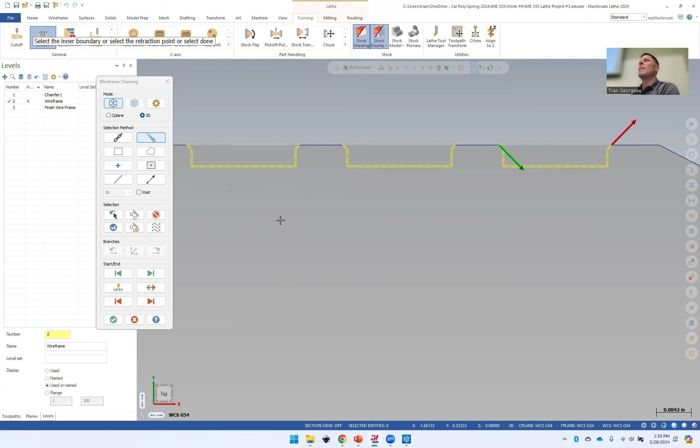So I'm good with this though. I've got 4 different chains. I do not chain the top lines. It will turn the top lines. It'll look horrible. So when I hit check mark, I now have a grooving tool. Look at all the grooving tool path, and it only shows you grooving tools.

Someone was thinking. It doesn't matter what tool holder you have, but if you want to set it up like we really have, we have a right-handed OD grooving tool. I don't care which one you pick. It just has to be OD groove right. We are going to then hit edit tool. What matters with this, what size does it say it is? What does it say?

We have an 094, I believe. Instead of an 1/8 of an inch, our inserts changed. I forgot to change this document, is the problem. So everybody write down, instead of 125, we have a 0.094. Just do that for right now. Actually do 0925 just in case. Yeah, just do that. If that number changes, I'll let you know. You just put the number, change it to 0.094.

I think it's 0925. Now, it does have a really small radius on C. I think it's only like 5 thou. It's almost square, but there is a small radius to keep a stress riser out of it. We'd have to look it up on the package and see what it actually is. All you care about is grooving tools are not standardized, right? So I can't pick CNMG. I have to basically just make the little puck look exactly like my grooving tool looks. They make ones that have angles, they make ones that have full radii. You just build it parametrically so it's just like your grooving tool.

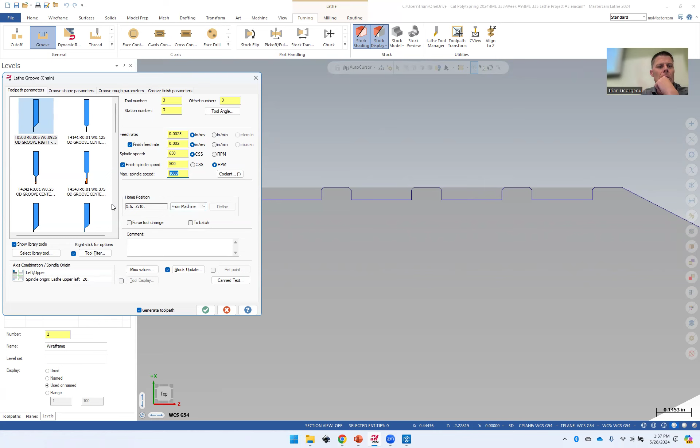Everything gets a single sharp edge chamfer, except the back has a 25 thou because that was on the drawing. So now when I go to groove shape parameters, what angle do I want to groove in with my grooving tool, you think? Yeah, we don't change that. You can change it, but we're not.

So 90 makes sense. You could go in at like 48. That'd be weird, don't do that. There might be reasons for that though; you might have some geometry. This is really good software that's been designed to make your machining robot do exactly what you want. So there's all these weird little options you don't necessarily need to change.

So now we do want to change our rough, because it's roughing at 75% of the grooving width. That's a lot. I would do more like 40%. It tries to bury the whole insert while it roughs. So we're going to do 40% step over. Then we're going to leave 5 thou. You could do smooth or you could do steps on how it grooves walls. We don't have any walls to step, so we're good.

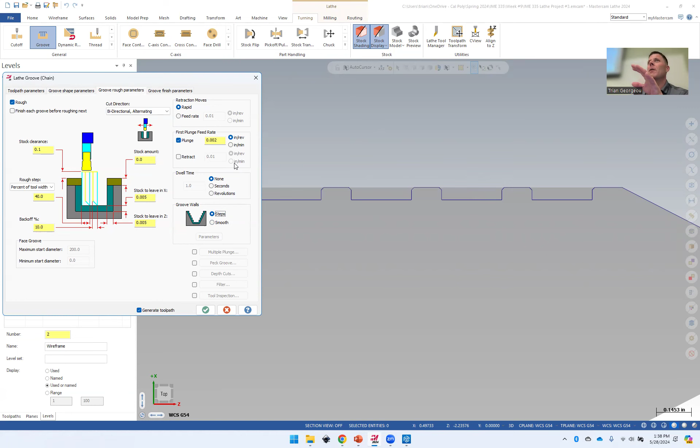You could do a first plunge feed rate. You see that? If you're having a hard time on the full width of cut, you could change that right here. That's cool, we're not going to worry about that though. Now for the finish, the finish step over, basically we're going to leave everything by default. You can look at the different settings if you wanted to, but you don't really need to change anything. When we hit check mark, it grooves it.

You want to see what that looks like? We're going to go over to the toolpaths; I just want to show you with the back plot. We're going to back plot that. Yeah, that works. Cool. All right, what's our last step? Oh, okay, we're going to part off. So we're going to shade that stock. We should get rid of it now so it'll disappear.

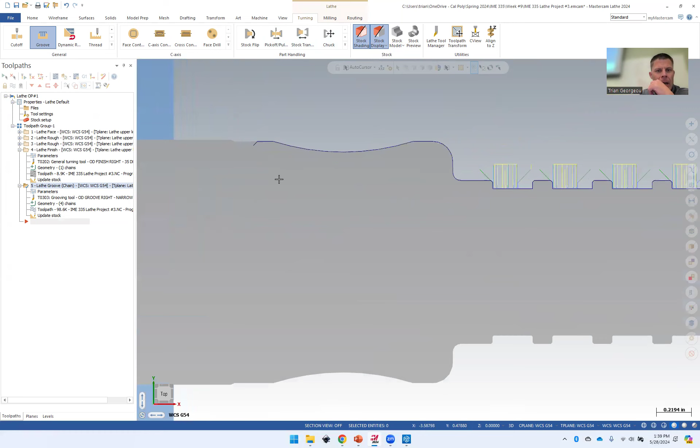Now, is my part off point on this geometry or my last geometry? Last one. The other wireframe that I had, because I extended the part off to the chamfer value. Remember that? I need to be able to click on the back of the model where I want to send the part off tool. If I click down here, it's going to go too low. So I'm going to show my finished wireframe. You want to know how you could put a point back there if you didn't want to show the finished wireframe? Let me show you that.

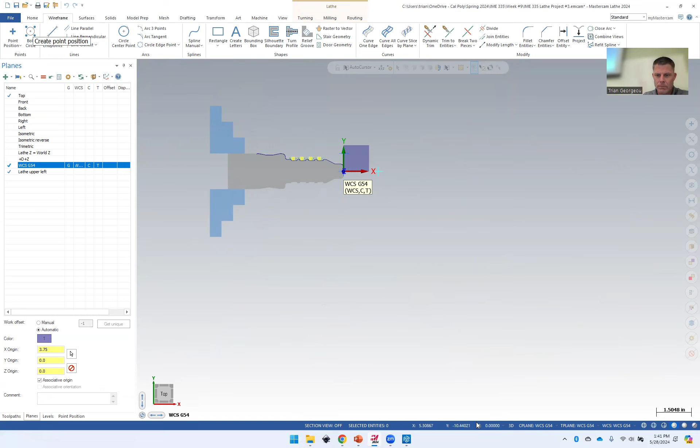I could literally go right to wireframe, point. Oh, I don't know if it's in D and Z. So D is X, so I think it's going to be 1.48, 0, negative 3.75. No, that wasn't the spot. That was up here, so it's off. Hold on. If I move this over here.

It's off of back here. So we have the X and the Y. You see the X and the Y back there? You could put a point basically right there at that point, but I'm not worried about it. Let me just show you the real wireframe. So we go back to levels, that wireframe. I'm going to hide that wireframe.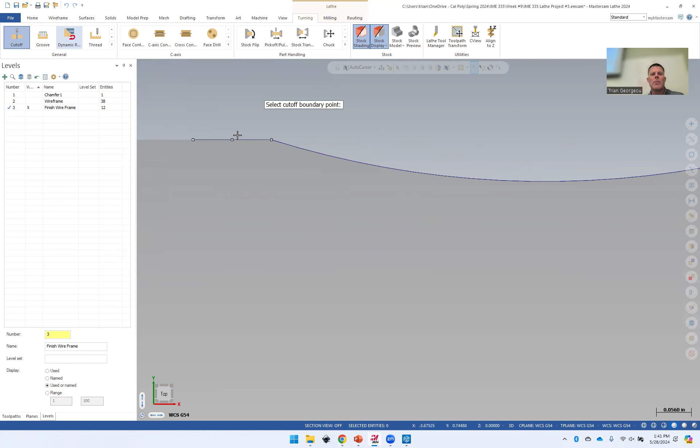And when you pick turning, what am I going to pick? Cutoff. And you see it says select cutoff boundary point, right there. I moved it into space so you can see it. Where am I going to pick? If I pick on the line, should I pick over here on the midpoint or over here? That was bad, right? You actually have to pick on the endpoint. So I'm going to press X. So I'm going to do cutoff, pick the endpoint this time, right there.

Now, they're grooving tools, so I go all the way to the bottom. I might have a right-hand cutoff tool or a left-hand cutoff tool. I have a right-hand one. So we'll go right-hand, right-click. We're going to edit that. What matters on the part-off tools, do you think?

What's the most important thing in this tool geometry? Thickness right here. This D, or this E, 125. And it happens to be the exact part-off tool we have. Most part-off tools are 1/8 inch. Now, we don't have this sweet little C angle in ours. We actually have 0. So we are going to make a nub at the end.

If you didn't want to make a nub, you would have a left-handed part-off tool that goes this way, and it basically has a little rake to it, so it's gonna go ahead and take the nub off first. We just have neutral part-off tools, so we're gonna leave a little nub. I'm not too worried. So when I pick that, I'm gonna go to my holder. I don't change my holder.

And on my parameters, I definitely need to make that 4. So it's tool 4. 2.5 thou. I don't want you going above 500 RPM to part off either. We don't need that thing spinning super fast and flying out of the lathe. Every now and then it hits the rubber pad, hits the spindle and it kicks.

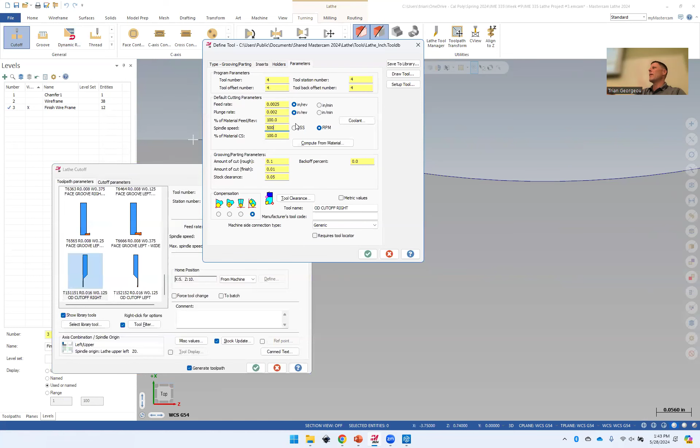So make sure there's no chips in your rubber pad. Your rubber pad's not angled towards the spindle. I've had people put the rubber pad down on chips, so it's angled like this. So just a nice flat rubber pad on there. It won't dent. It'll be great.

So when I hit check mark, I'm now going to use tool 4, the cutoff right. I'm going to go to cutoff parameters. With that, this is really cool, but it barely works. Do you see this back here corner geometry where it says chamfer? It'll put a chamfer in the back with the part-off tool. You really need to groove a little bit out of the way first and then do it.

This part-off tool flexes when it does that, and you don't see your chamfer, but I'm going to put it on there anyway. But does that make sense? You groove away a little bit in the back, and you can put the chamfer on the back and then part off, and you'd have a chamfer on the back side of the part. I'm too lazy to set all that up right now, so we're just going to do it the way I'm showing you.

So what we're going to do is we're going to hit parameters. We're going to go to width, and it's 0.025 and 45 degrees. Look, it puts a 3 thou top radius and bottom radius on it. You're not going to see it. It's the size of a hair. So now, do I just want to jam this part-off tool right through it? What do you think? Slow down.

What do we do with our part-off tool to break chips? Peck. So I'm going to click this radio button that says peck. It turns it on. Now I got to set up my peck settings. I can't just click the button. So when I hit peck, this would be very bad if you don't understand absolute and incremental. So we are going to basically use retract moves.

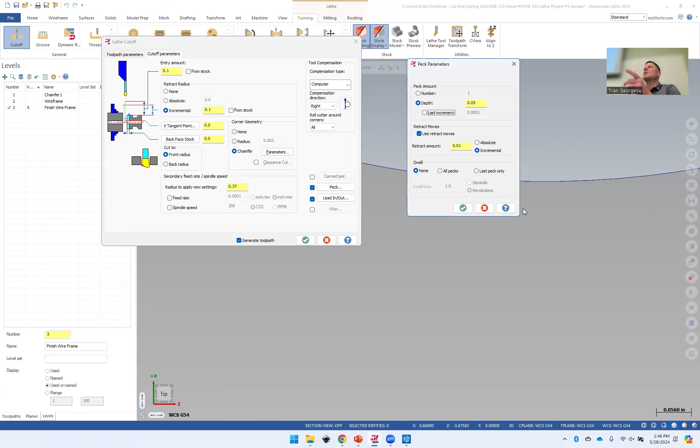So what it's going to do, it'll peck down. It's probably going to tell me it crashes when it does the chamfer. I tell you that, it's going to be okay. Nothing's going to crash. So when I hit check mark, yep. There we go. It collided with stock, but the stock's missing. We're good to go. You see how the stock's now not on the part? And if you look at this, what's this little radius?

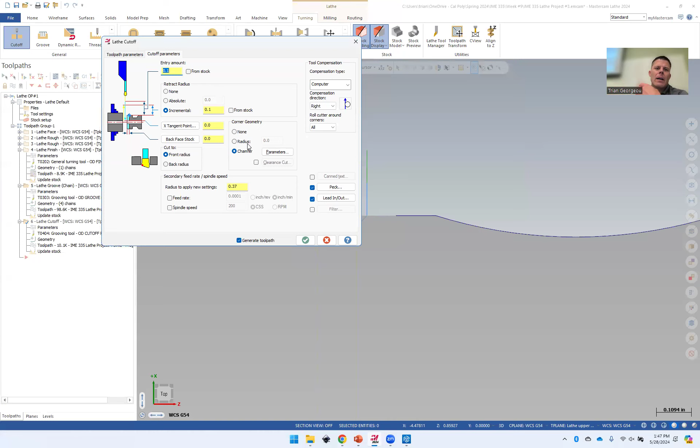All right, let me go right here. Tool paths, parameters. Don't put those in there. It doesn't matter if you do or not, it still says it crashes, but at least it took out those little arcs, right? But now, if it was me, honestly, it's not going to do the chamfer. Check mark. It doesn't crash when it doesn't do the chamfer because it's not trying to turn with the part-off tool. It's running into stock, and I didn't clear the stock out of the way is what it is.

You good with this? That was all it is. That's the whole project. So now, what we're going to do, because I showed lathe setup individually last week, I'm going to bring all 30 of you in there. We're going to pull it out. We're going to run this. Does that sound good? Because then you're going to do it on your own, and I feel you're going to be good to go because I showed you setup last week. I'm still going to set up this week, but with 30 of you in there. That way we can work on the rest of the lab here.

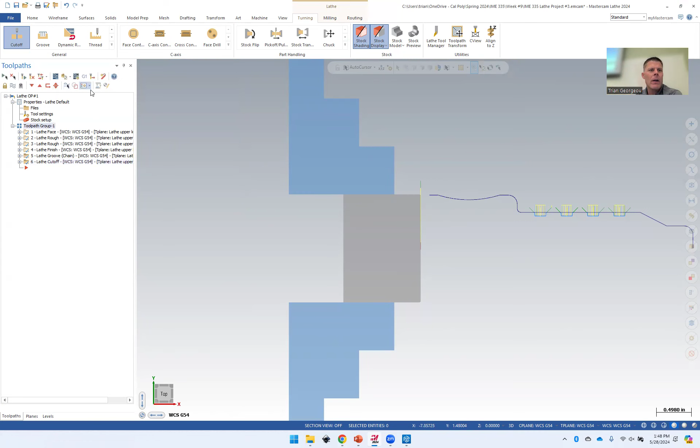So I would like you to simulate. Yes, you want to stick? I don't care either way. It's not gonna make it, I'm telling you right now. You can keep it on if you want to try it, but on some people's parts it's at least like a little edge break. Some people's it doesn't do it. So doesn't matter to me. It could be how they set up too, because you're touching off all your own tools, and your tools might be a little bit off. You're not seeing the chamfer. But I'm gonna call it good there. I would probably go to the simulation. Simulation definitely shows you mistakes, right?

I wasn't looking at you. Kind of. So it's all good. At least we're having fun, right?

So to make it a slant bed, it goes back this way. To make it a tool room lathe, it goes this way. That's the only difference, where the tool's oriented. It makes the little blue lines for the chuck, just to make sure we're not going to hit it. We're going to slow it down a little bit and press play. That's bad. Good thing we simulated. I don't know if it's actually going to do that. We'll look at it in a second. We made a bullet. I actually don't know what did that. So let's look.

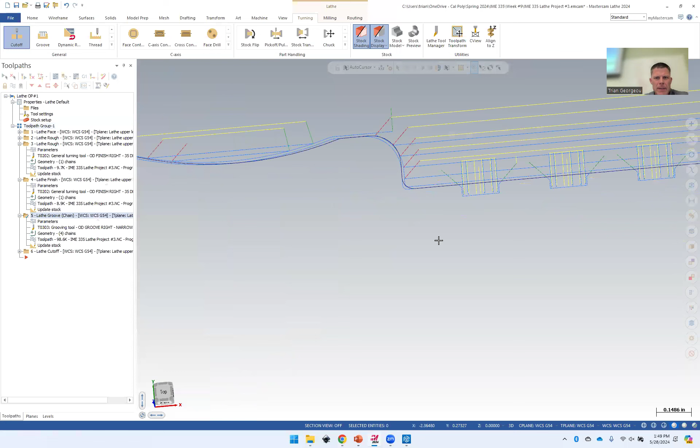It's literally retract from one to the other. Did we name all the tools 1, 2, 3, 4? Hold on. I don't think it does that. I think that's a mistake. Let's watch it again. That's kind of weird, isn't it? I didn't see it on the stock or anything like that, right? So when that happens, you definitely want to look at that kind of stuff. I'm just curious because it was right here.

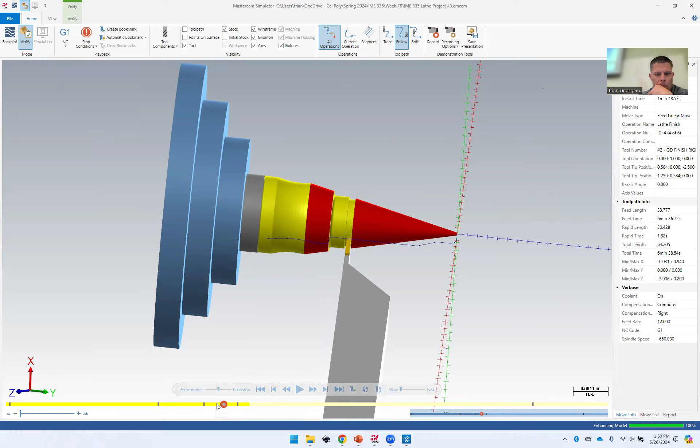That was the retract out of the rough. You see that? Yeah, it was right here. Hold on. It's that move right there where it transitions tool paths. I don't think it's going to do that. Let's look at the code. That is just really weird though. It might do that. Let's go back and look at the toolpath first.

I keep forgetting I'm on video.

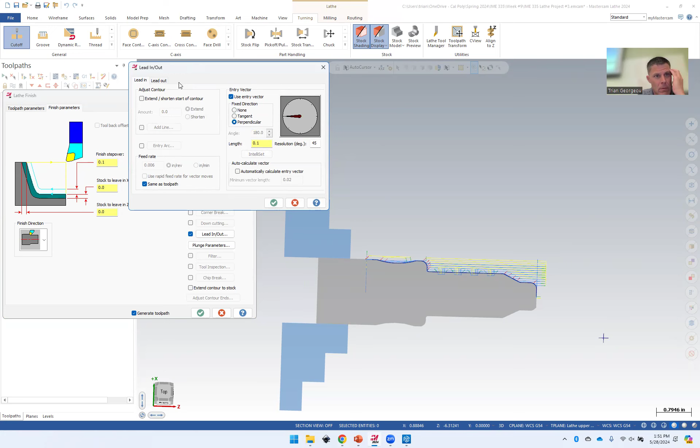So let's go over here. Let's go from the rough. Let's go to parameters. Let's just look at lead out. There's 45 out. We're good to go. Comes out. And then when it comes here to finish, I'm just going to hit perpendicular there. I honestly don't think it's going to do it. This is weird. Okay.

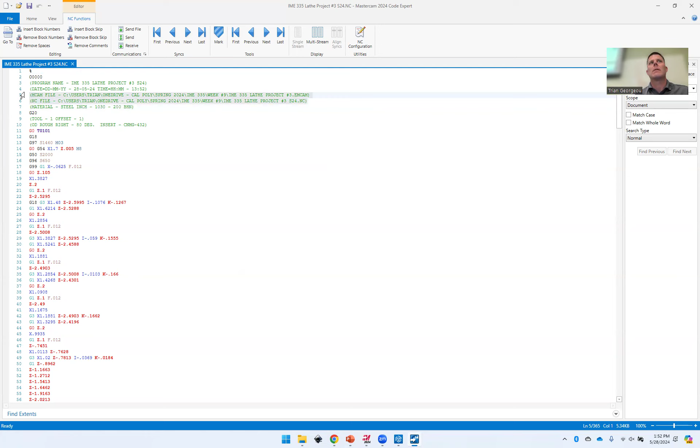So how are we going to tell that? We're going to go hit G1. We're going to hit check mark. That's 336. So spring, and 335. This is week 9, huh? So project 3, S24. We've got to do something to the code too. So why am I getting rid of this? Too long, it could be. Then we're going to call this 00337. Sound good? Then we're going to look at our X values.

Can you close that door?

It's really bad. So we look at our X values. Thank you. Why does it come across negative X here? And why is that number 0.0625?

0.03125 is 1/32 of an inch, right? And you double that because it's diameter. So it's going across the center of the nose radius value. That's the only negative X you should ever see in your program. It's from facing; it should come slightly across center line for the nose radius value. Everything else should be positive X.

Please look at your code before you actually go to the machine. It's gonna save you some time. Sometimes some students have their stuff flipped. I check to see if the lines look good. I don't really check these that well. It's the end of the year, I'm really busy. I look at them, I double check, but every now and then you're just off on your X's or your Z's. So I look to make sure the code looks good, I make sure lines look good. That's all I look at. So now, when it goes across here, it comes over here.

What are U, V, and W in lathe programming? You watched the video, you know. Incremental, right? So why would this be bad for our lathe? Only one thing is bad in there for our lathe. U is for which axis? V is for which axis? The Y. Do we have a Y-axis lathe? No, so the only thing you have to erase from your post is basically V0. What I'm gonna do, because you see it's G28ing anyway, I'm just gonna erase U, V, and W. I don't need any incremental in my program. So between tool changes, it stops the spindle and goes home.

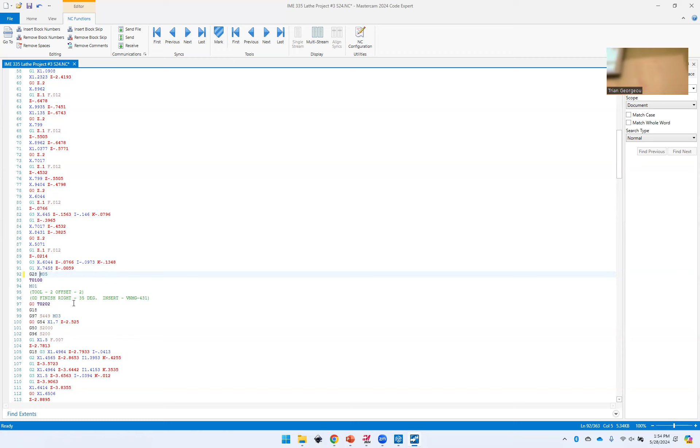What happens if you don't delete that? It's gonna throw an alarm. When it goes to hit that line of code, the machine's gonna alarm out because it doesn't have that axis. It's gonna try to make the move and it can't. I don't know what it says exactly, but it's not gonna hurt anything if you didn't take that out. You're just gonna have a red light. So how many times do you think that occurs? How many tools do we have? 4. So at the end of every tool, you look at that.

Now it comes over to G00 Z0.1. Then it goes to X0. Then it goes to G1 Z0. We're doing good so far, aren't we? I don't know why that shows crashing. It's not going to crash, promise you. Does this make sense how I figured that out? I just looked at the lead out move right here, then I saw where it was going. It rapids back to 0.1 in front of the part, goes back down to center line.

In fact, I'm going to make it go to X of negative 0.0625, right? So it just takes care of the insert. I didn't do that on my face pass. And then literally we're good to go. You don't have to do that whatsoever. In fact, I'm not going to change it. I'm gonna leave it at 0 to prove it to you. Cool. All right.

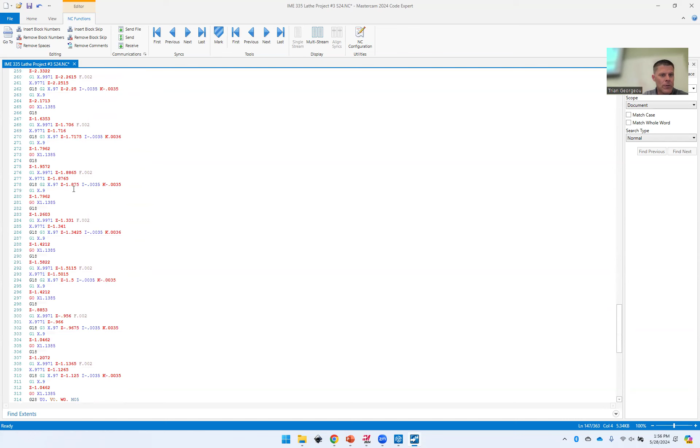Now, what do I erase down here? UVW. So you can search for any U's, V's, or W's and then you'd be good. So now this one is the grooving tool. It's grooving a bunch, then it finishes grooves right there, it's making the chamfers. And what do I erase at the end of that tool path? UVW. Like a broken record. Now we're cutting off. These are just the plunge X moves. Now, what do I erase? UVW. We're good to go.

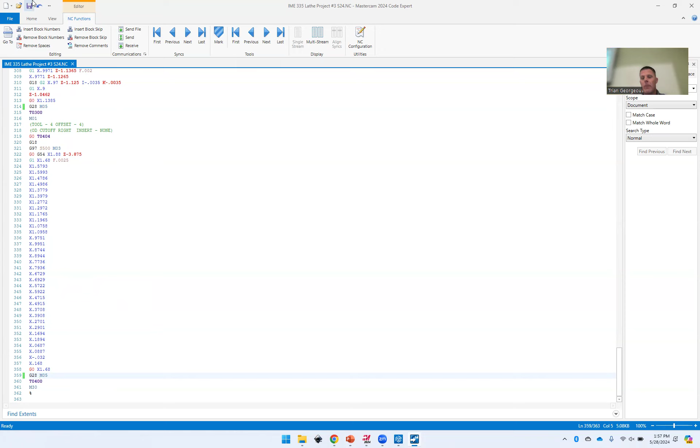We press save. I don't have a memory stick. Anybody got one? Yeah, fail on my part. I'm bringing the whole computer. So let's go to the lab. I'm going to show you the setup now, then it's open lab for you. Let me actually go back to the PowerPoint real quick and stop the video. That would have been really bad.

So basically, from here on out, it's a homework assignment. It's lab experience 7, to set up the lathe. So if you're watching the video, we'll see you in the lab. So we'll stop that recording.